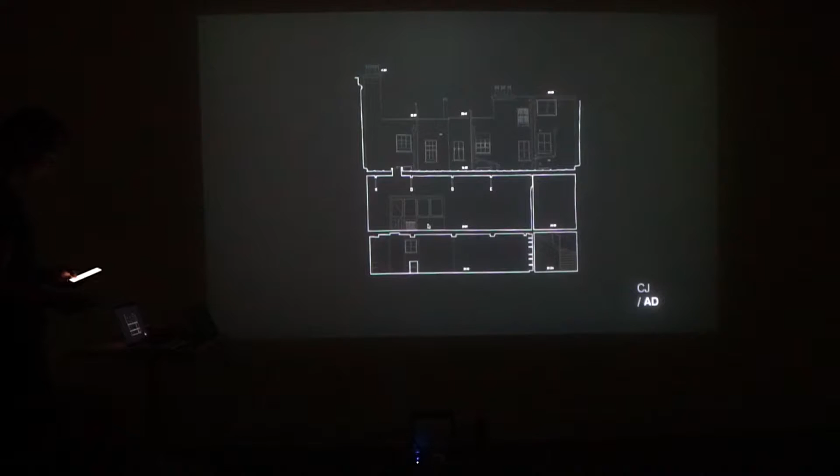So on a commercial basis, we deliver these embedded 3D data sets, which can also come with 2D plan drawings and 2D sections, as well as 3D BIM models. We can also infer and create meshes from the 3D point cloud data, so we can then turn that into, potentially, a 3D print, for example.

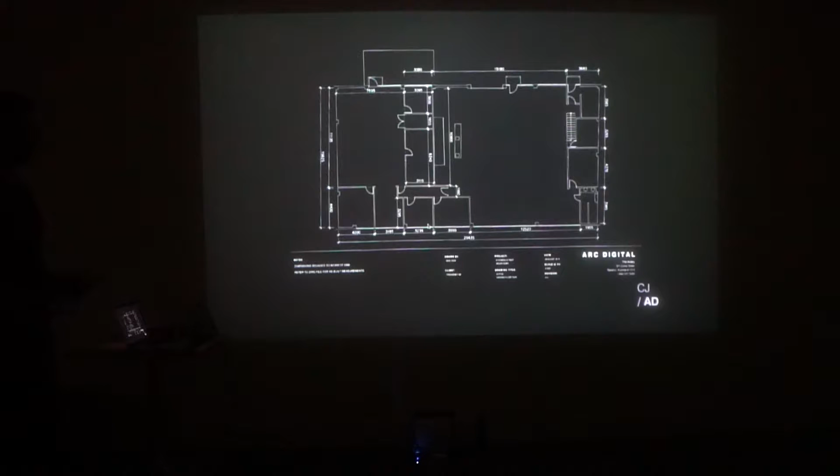Another example of work we've done for an architect and project manager for a warehouse refit on Nikau Street, converting that into a comprehensible CAD drawing as well. These point clouds are heavy data sets, but they can be brought into these BIM packages, and they can also be brought into the likes of SketchUp as well, and we do that in-house. So we either deliver the actual data set, or we deliver the BIM model or the SketchUp model, if that's what the client prefers.

So that's an overview of that same point cloud.

In the same vein as the exhibition, we offer an online walkthrough with all of our deliverables. It becomes quite a powerful tool for the architect and for the project manager, because the architect generally works on a daily basis with these kinds of projected drawings and BIM models, which the client may not be as familiar with. But these kinds of drawings and models are something the client can speak to and they live in, right?

For the architect themselves as well, it's a way of avoiding having to go back to the site, right? If it's like, oh, what have I done here, let's go back - it's a way of avoiding that time sink, because you're always going to forget things, you're always going to forget to measure things. So having something like this on hand is incredibly useful.

So you can view it as a floor plan, as a dollhouse, or view only one floor - we'll separate it out. And again, this is all just through your browser. It uses WebGL, which is really handy, because if you're on site somewhere else and you get a call from the client about something, you need to check the site, it's right there in front of you.

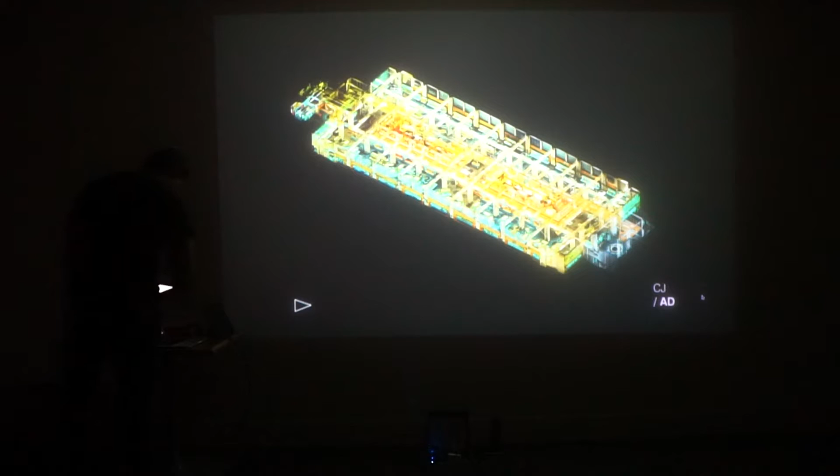Let's see if I can play this video. This is actually, I'll make that full screen.

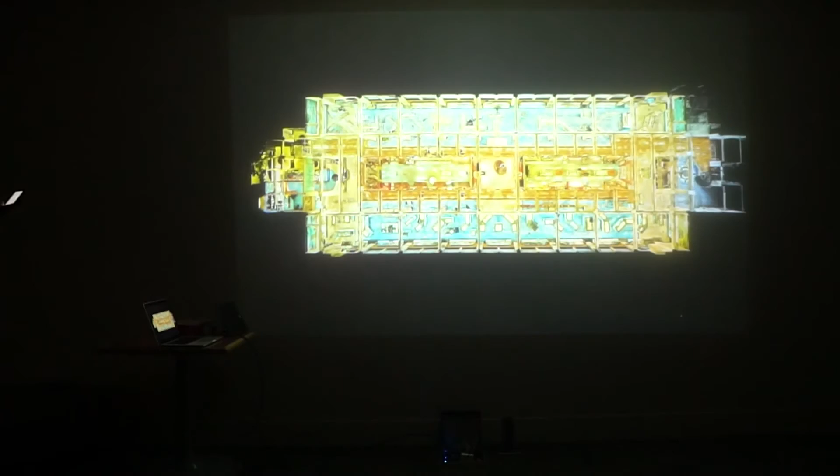Is that playing? Yeah. So this is part of the Science Museum in London, and it's one of the few large galleries in the Science Museum which a lot of people hold quite dear, just from the length of time the exhibition has been on, it's been on for half a century, and the kinds of pieces it holds. So these are the shipping galleries, which have since been decommissioned, and they're about to make way for a new kind of exciting exhibition on information and communication.

So these guys were approached to create a digital archive of the museum and focus on the entire space, which includes thousands of pieces displayed in the exhibit. What you're seeing is basically models and replicas that are handmade by those who are probably now granddads, and replicas of engines and steam engines and anything you can think about that's associated with maritime at this gallery.

So they spent close to a week after hours essentially 3D scanning the space and capturing all the pieces. What they've got now is a complete digital replica of what was. This is only an animation or a fly-through of that data, but what you can do with that data extends beyond that, right?

This is no longer there. I think they've already opened up the new exhibition, because this would have been in 2015 that they recorded it. But what's amazing is that you can start to isolate some of these pieces.

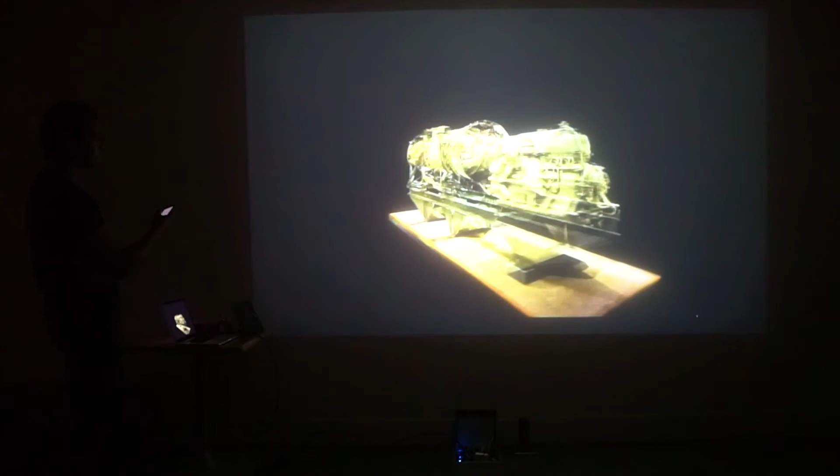So you can isolate the individual artifacts and exhibits just from these large-scale 3D scans. What that means in terms of an interactive experience is that you can have an application or a web page that allows you to search by database or even walk through the exhibition as if you were actually there, potentially go into VR in the future when the technology catches up.

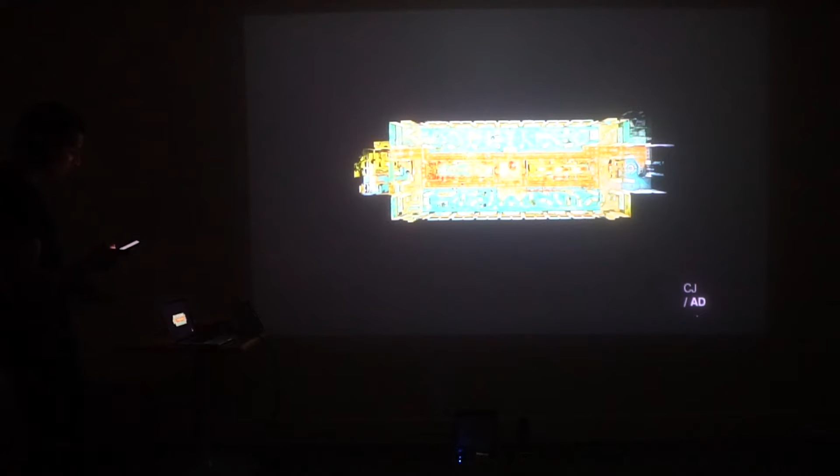So here we have a plan. As I was explaining earlier, once you have the data, you can take the drawings from whichever view you fancy, and you can start cutting bits up and revealing the inner workings of the gallery to your heart's content. Some other shots were extracted from the model.

So this is another example of that. This is the Bartlett exhibition. Being Bartlett graduates, they scan the exhibition every year, and it's basically an exhibition of architectural models and drawings, illustrations, etc. that comprises a year's worth of work at the Bartlett School of Architecture.

Once they've scanned it, they create an application or web page which you can access and then peruse the drawings and the work in some way. For example, this is the interface they've got on their application, released every year. Essentially with that application, you have a macro view where you can pull a section plane, an invisible section plane, down through the point cloud.

And view it from that isometric angle. You can also isolate individual units, being their studio groups, and peruse them from a certain angle. But you can also, of course, get quite close to the drawings as well.

Because of the level of detail that the scanner is actually capturing these pieces in this work, you've got, apart from the physical characteristics of the medium, what is essentially a digital replica of that object, of that created piece.